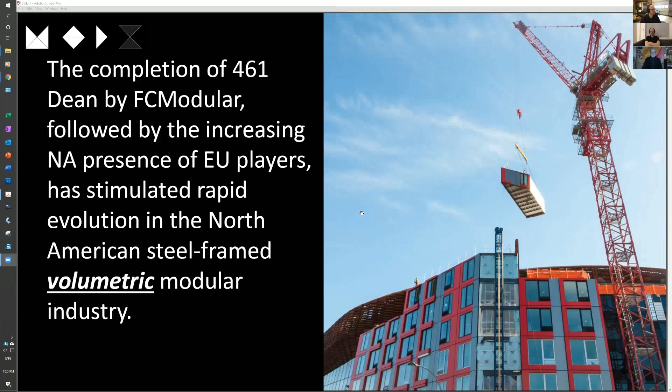Yeah. So what's happened, of course, especially in New York City, you have the Polish invasion, DMD and Polcom, who are supplying modules into the New York market via Skystone Group, and they've developed a number of projects and continue to do so. So just to quickly cover what happened with B2, they imported a technology from England, which is popularly referred to as the Powerwall system, and the next slide really shows it.

There's kind of a plate with threaded rods projecting up from it, and these threaded rods pass up through the hollow steel sections at the corners of the modules. And if I go back, you can see here a module landing on one of those fittings. And so, of course, this provides, to be honest, very limited vertical tension capacity. So there's nothing to stop the building basically from blowing over in a high wind. Colloquially, that's the way to describe it.

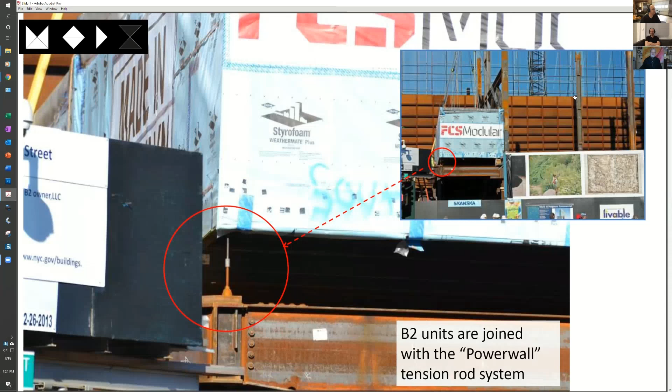So the way that's managed, as you can see here in the top right of that slide, is there is a brace frame, and there you see a much better view of it, and that's the system through which all of the lateral forces are converted into vertical forces and taken down to the foundations. So the modules are tied into that brace frame at multiple points over the length of the building.

And the very great problem that they had there was that the tolerances in the brace frame and the tolerances in the modules were distinctly different. And even the modules themselves were not terrifically accurate. So there was an enormous amount of shimming and cutting and packing and adjustment and monitoring and surveying and everything that was required to erect this building. And consequently, a lot of cost and delays resulted from that. So

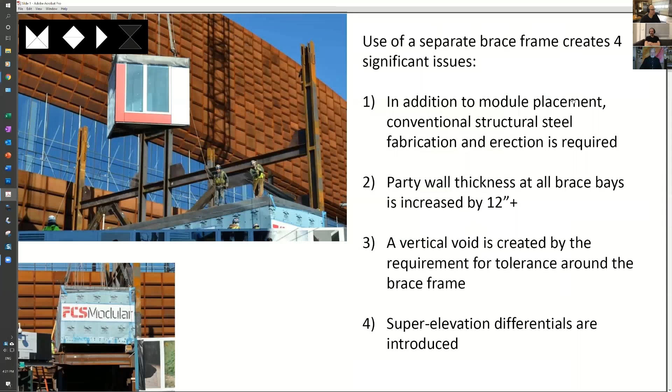I take some credit, whether it's justified or not, for introducing the idea of tolerance accumulation to the discussion about modular construction, tall modular construction. And I created this slide during the Vectorbloc period to explain that. What's interesting is if you looked at the facade of B2 when they got to about the 10th floor, there really was a 1 inch plus variation in the height of the stacks and large gaps starting to show up, which were attributable to this issue.

And so the conclusion was that you needed a precise, geometrically predictable system in order to control the dimensions of the modules in all three axes. So you knew where you were as you went up. You knew where you were as you're manufacturing the frames. You knew where you were as you're assembling the frames. You knew where you are once the frames are assembled. And that was the genesis of the Vectorbloc system.

So it preserved the hollow steel section structural concept that had been developed by Arup and manufactured by Banker Steel, but it added this steel casting at the corner, which provided all of the locating features. Yeah.

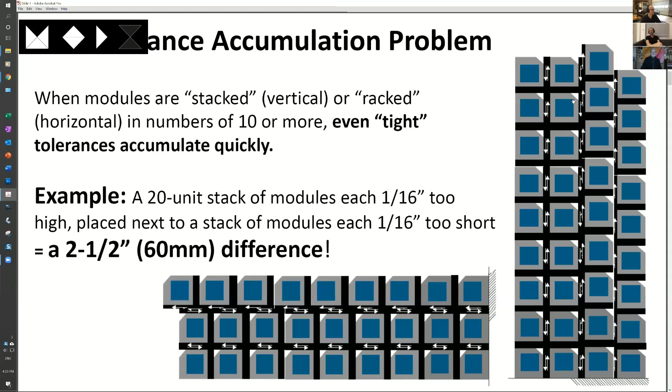Well, so I believe, I hope there's a slide that comes up that shows how this system is adapted to provide the lateral capacity within the modules. But essentially, by installing diagonal bracing, tension compression bracing, in a frame made with a system like this, the lateral forces are handled within each module. And as you stack the modules, you're stacking the diagonal system of the building as well.

Yeah. It's a really interesting concept, and I remember seeing it years ago, Julian, when you were starting to market this and discuss it at various conferences. One thing it got me thinking a lot about was, for lack of a better way to describe it, the innovative thing about Lego. I know modular is often likened to Lego, but I'm going to take a different tack on this. The interesting thing about Lego is the standardization of the connection, right? That allows you to have infinite variability within a system.

So you might describe this also as like the 110 outlet in North America: you can take any device and plug it into the wall and it works, because of the standard plug, the standard outlet. And in many ways, the problem with construction over the years when we start talking about standards is people think that means you can't have any variability. But what you've tackled is, no, the standard is the connection. It's the way in which the elements come together. The variability is everything else that you want to do around that connection. Which is really interesting.

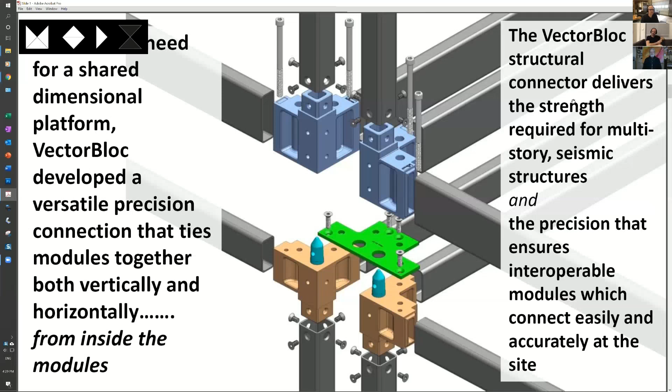Yeah, and by the way, there's a classic case here as well of how a whole bunch of things have to converge for this to work. The ease of making weldable steel castings, because this isn't cast iron, of course. This is steel, and it has to be weldable. The precision of the hollow steel sections themselves, the laser cutting of the gusset plates, the machining of the locating pins and everything else, the existence of the robotic systems, all of these contribute to the feasibility of an approach like this. And were this to be done manually, let's say, it would not be as cost effective for sure.

Yeah. That's great. Oh, Julian, yeah, why don't you keep going and we'll look at how this is played out.

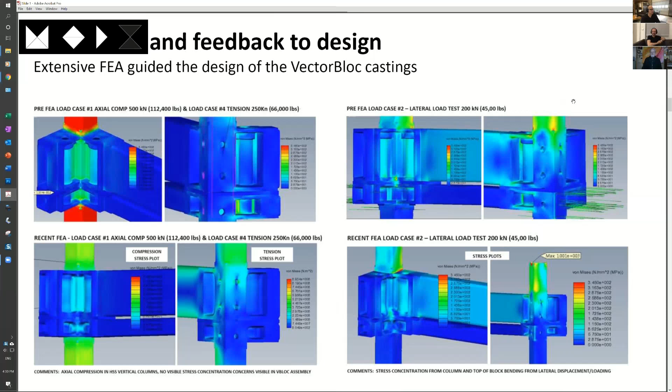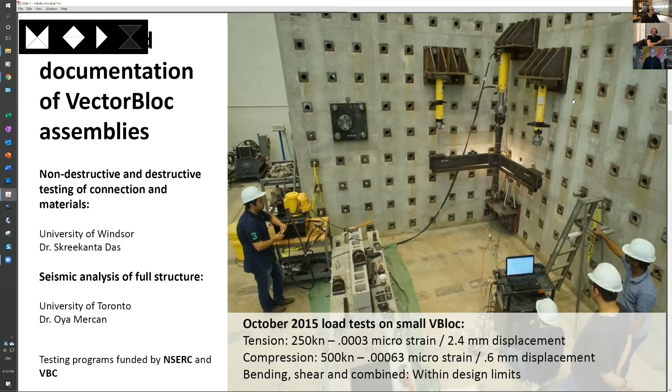Yeah, just by the way, we've covered this, but to be clear, again, the role of what's now called Industry 4.0 and so on is abundant here. We leveraged the 3D model of the Vectorblocs in order to do all of our simulation work prior to commissioning the castings and so on. And we did fully instrumented testing at the University of Windsor to get all of our ultimate limit state information in the bag and so on. So that company's clearly taken off, and it's now the dominant player actually in North America.

And so, going back to the mountain, the guy stroking his beard on the mountaintop with the icy winds on the side of his head and rethinking everything. My former parent company, the Walters Group, created and owns an entity called iSpan, who have a really beautiful I-beam shaped rolled steel section. It's basically like this classic C section light steel framed joist, except that both the top and bottom flanges are T-shaped, and they're double rolled. So they're putting steel where it's needed.

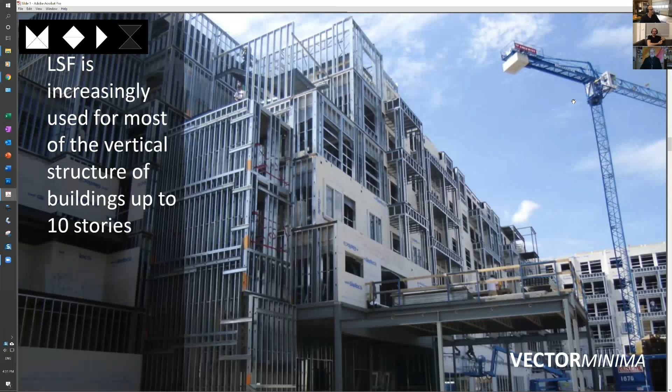Really nice. And I saw that there's a lot of innovation in this space, and I started looking at the masses, and they're routinely building buildings that are in the 11 to 12 pounds per square foot for the steel. The light steel framing, and that's very efficient, and the costs are very low. However, the state of the art in that industry is some really super dodgy welding that you really can't call real, as evidenced in this image here, and this is unfortunately ubiquitous. You see an enormous amount of this, and I can't imagine how this is all possible, and yet you see a lot of it.

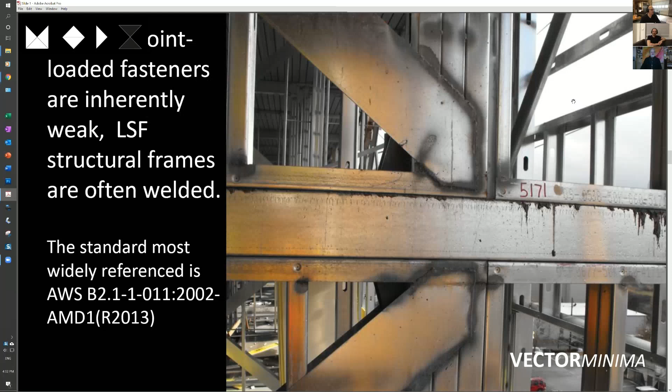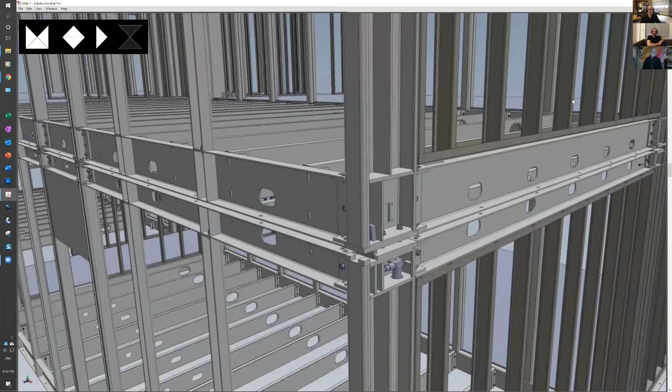And so we sought to develop a system that is, again, coil fed. The raw material is coil. Coil is a very efficient raw material for the mass production of structures. But where each member is utilized optimally in its role. So you see here the rim joists and columns. The rim joists obviously are loaded horizontally, in bending and tension and compression, depending on the forces on the building. The columns obviously in tension and compression. And so we've conceived of them as 1/4-inch material as the baseline, trending down to 1/8 and up to 3/8, depending on the loading. And the floor system, the horizontal system, is entirely light steel framing. This is highly efficient.

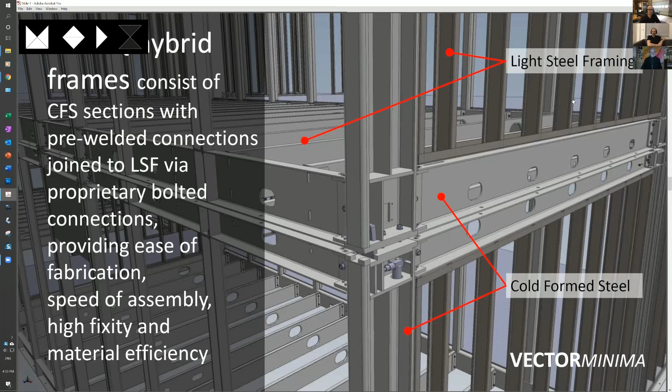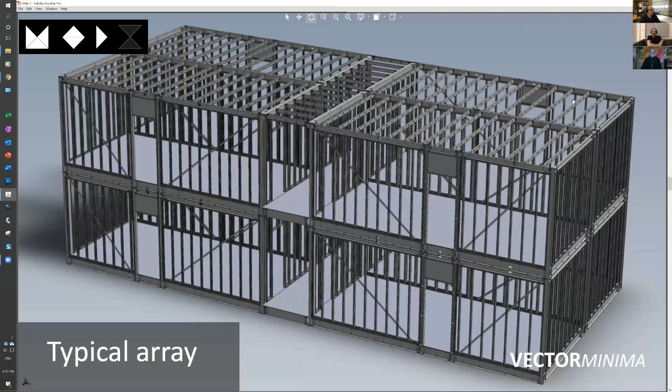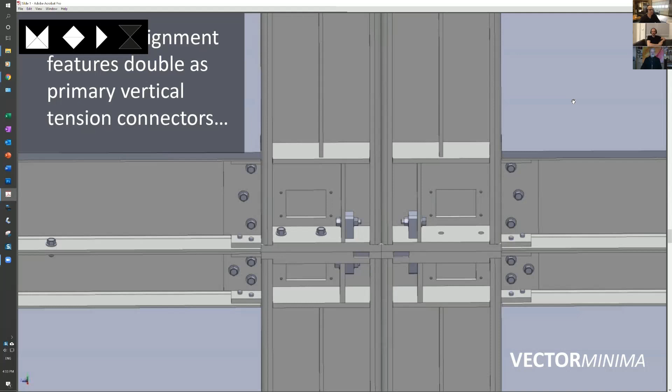So the skeletal structure of the building has essentially outline frames made of cold form steel, in other words, brake form steel, and horizontal systems made of roll form steel, the light steel framing. But an essential feature of the concept, which has been around now for decades, is this idea of precision locating features, just like those conical features on the power wall system, or the knuckles on the corners of ocean freight containers. So you need something that guides the module very precisely into its final location, and some means of providing that horizontal connection.

So we've been able to pack all of that into an extremely dense 4-inch by 4-inch space. So the entire connection, the vertical locating, vertical tension, and horizontal capacity, all occurs essentially between two modules in a 4-inch by 8-inch space, 4 inches by 4 inches on the top of each one.

And so this confers obviously an enormous number of benefits. So here you're seeing that the vertical locating feature is also the vertical tension capacity, is also the horizontal shear capacity. That connection piece, which has the tapered sides to it, provides a solid clamping action for the horizontal connection. So all in all, this is a very, very nice solution to the provision of vertical tension, horizontal shear, horizontal diaphragm action, and precise location.

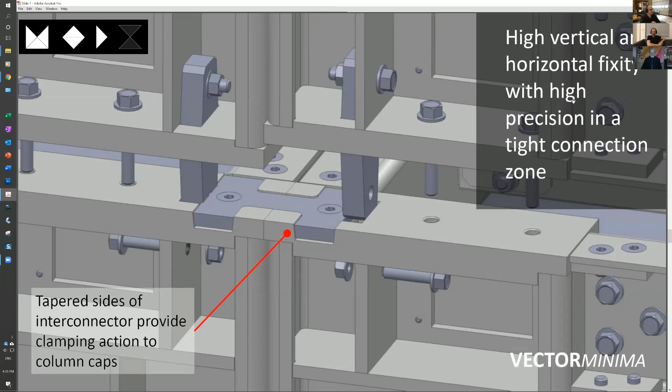And there's a benefit here, which is of course with those very wide, the typical column. We can build these with 4x4 columns, but you'd have to provide lateral capacity through some other means. If you bump those columns up to 4x12, and you look at the ribbing that's going on here, the stiffeners and so on, you actually have a significant amount of moment capacity in the connections, which gives you the lateral capacity that's adequate for low-rise buildings. So we're solving a ton of problems all at once.

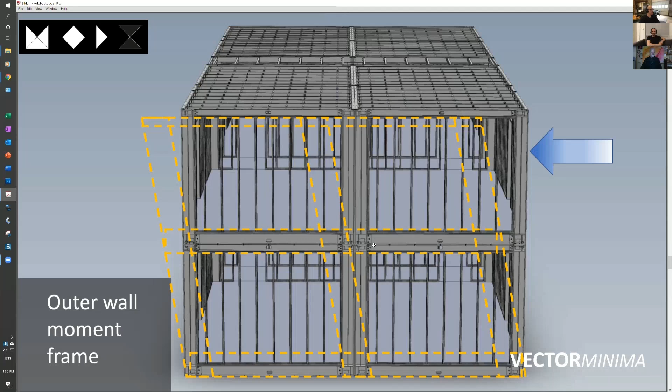I want to dive into the floor joist a little bit. So your typical connection between a light steel joist and the rim joist is essentially a sheet metal angle with a ton of Tek screws, a ton of self-drilling, self-tapping screws into it. There's other systems which are essentially an ear bent out of a cutout in the rim joist and fastened using mechanical fasteners to the joist.

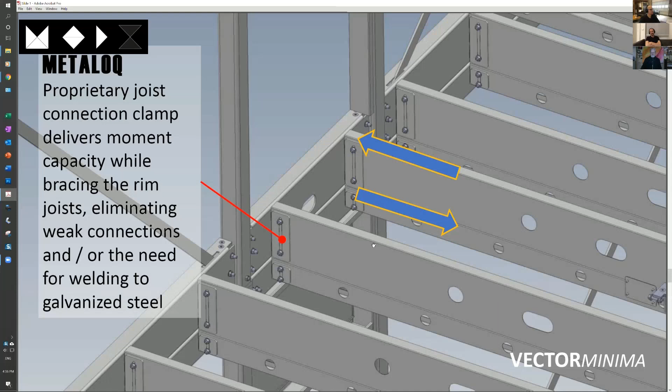The problem with all of those is that it's actually a very weak connection in this manner, and the fixity between the joist and the rim joist is very poor in the rotational mode. And there also isn't really a lot of tension capacity either. The only mode in which it's strong is in shear. And so we had to come up with a way of joining the joist to the rim joist so that they couldn't be pulled out, pushed in, sheared, or bent. And so that's where this approach comes in.

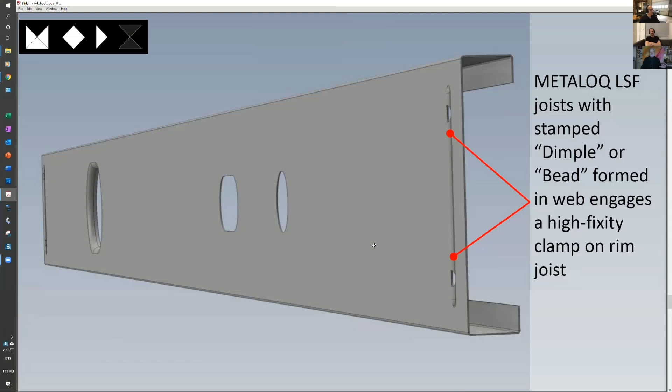We found that if you apply a moment to a light steel frame joist, then all the force goes onto the fasteners and they fail in shear or they tear through the metal. So by dimpling the light steel frame joist like this and then clamping it between two plates, we actually achieve a full moment connection between this sheet metal part and the rim joist. That's interesting. And this is absolutely key to developing the torsional stiffness that you need in a module floor assembly.

And the other thing, I suppose I should have a circle here. I don't know if you can see my cursor, but where the tab of that fixed plate goes through the rim joist, that's where the weld goes. And it's on the inside face of the rim joist, and therefore does not warp the rim joist in an undesirable way or cause a big bow in it, and so on. So we've resolved how to connect basically a sheet metal part to a structural part by clamping and still achieving the fixity that we need for a modular structure. And it's all 2 bolts and cheap.

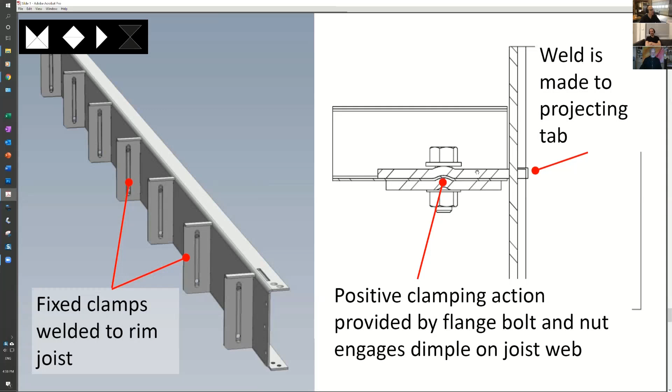So we've reduced the chassis really to 3 repeatable components. There's the light steel framed floor and ceiling framing, the outer horizontal members, the rim joist, and the vertical members, the columns. They only require a small work envelope for the robotic operation. The parts are easily detailed with lasers and so on. So it's really a very straightforward system to produce.

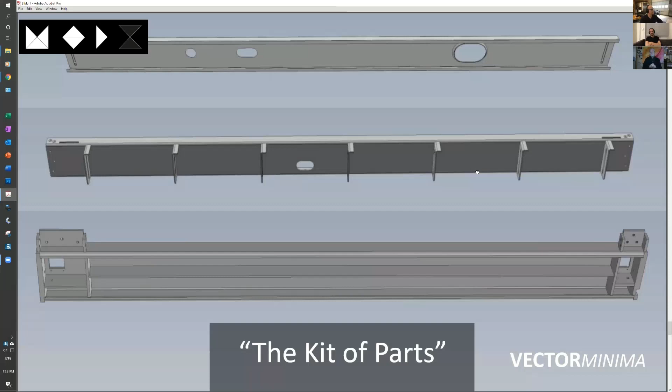And of course, I think an important point worth mentioning is that assembling those components to make a module frame does not require any fixtures. So you receive a kit in the plant, you need a flat floor, the parts bolt together, and you've got a square true module frame in a few hours. Say four workers with rolling ladders and maybe a few Genie lifts can put one of these frames together. And it's inherently square and true because the parts coming out of the plant are inherently square and true.

Yeah, so we've run a bunch of engineering simulations at this point with increasing levels of detail. So as usual, we concentrate on structures that are not optimal. Tall, narrow is a worst case scenario. It reveals your issues. So you see here an early run on a tall, narrow stack of 2 wide by 10 high. And you can see that only with the 1/4 inch material throughout, only in the lower floors do we even start to see any of the diagonal bracing over tensioned or over compressed. So it's obviously a very simple matter to bump that up.

And by the way, red in this case just means 100%. It doesn't mean actually fail. And that's 100% of a factored load. So what this really tells us is that we can lighten up our steel in the upper floors significantly. So 12 pounds a square foot, we don't even need to be that heavy, interestingly. So for low-rise structures, we believe we can get under 10 pounds a square foot.

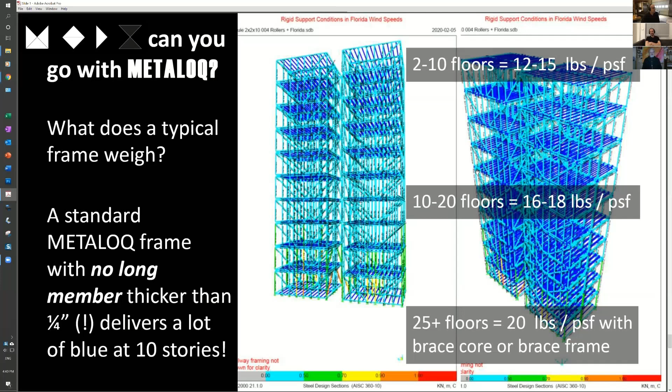So, Julian, and then another, yeah, please. Well, on this particular solution, have you been doing any testing, live testing of these connections yet?

Questions like that are always terribly embarrassing at this point in the development of a company. It's like, well, have you actually built anything yet or even tested anything yet? And the answer is, of course, no, we haven't. And so I suppose the conversation ends here, right? No, no.

I just saw in your last example you went and did some testing at the university. I just wondered if that was the next stage in some of this. Correct. Yes. So you're absolutely right, and it speaks to our business model. So our business model is we intend in this iteration of our efforts in the field of modular intellectual property development to be strictly a licensor of intellectual property.

Okay. So we develop these systems, and then we seek out entrepreneurial companies who want to deploy them. And the fees we get from those companies fund our work. So at this point, we've had adequate funding to get to this phase, and we've only just signed on enough people that we can take this to the next phase, which is, of course, full-scale prototype chassis and destructive testing.

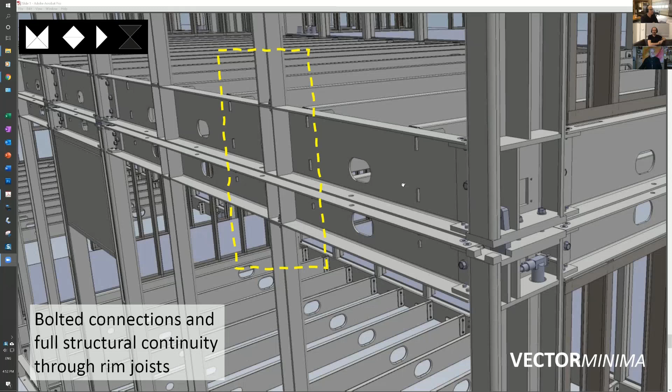So to cover a couple of other things here, just to get them on the record in this call, because I think you'd be interested in some of the other things we're working on. So the cost of all of the people that swarm on the building, even after the modules are placed, is very significant. So we've sought to reduce the crew size to the maximum extent possible.

So the first of the innovations that delivers this is what we're calling the plug and play capacity. You're leveraging the precision of the modules. So as the modules come together, the vertical locating features force them into alignment, and now they're dropping squarely one into the next. And so that opens up the possibility of having the water connections, the sewerage connections, the vent connections, and the electrical connections being made at the point that the modules contact each other. And so this eliminates the need for access covers and people to get into those spaces to make these connections.

And so the initial reaction of a lot of people to this has been, you got to be kidding. That's completely impossible. Never heard of such a thing. That'll never work. And then, grumbling, they'll go off and snap their garden hose together and start watering their plants. Or, if they're shop types, they might go and connect an air tool to an air line, and say, that Bowron guy's an idiot, while snapping the two pipes together and watering the lawn.

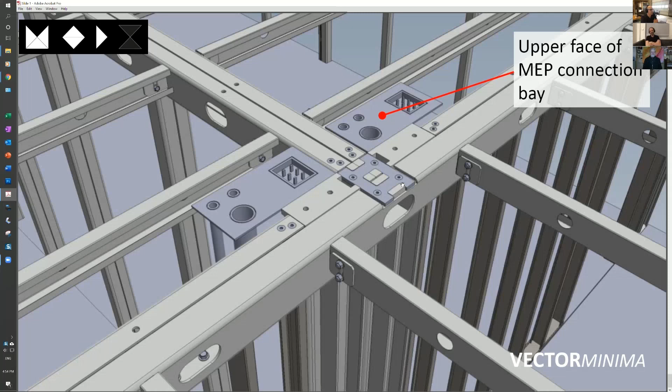And we've done math that shows that it's costing $2,000 to $3,000 per module to make electrical and plumbing connections, and another $1,500 to $2,000 per module to make the structural connections. And so to that end, we've also developed a system that has an autonomous mechanical connection between the stacked layers of modules that leverages the live electrical connection at the moment of setting the module. So you picture a module being placed and the electrical connection being live upon placement.

And now you have the ability to operate an electrically driven actuator that drives a pin into a link and connects the module to the structure. And so now the thing can't be blown off, can't be toppled by a wind. You may have to go in and supplement it later with additional mechanical connections, depending on the height of the tower. But at the very least, the module is safely locked into the building, and everybody can go home and get a good night's rest.

And so these two elements, the plug and play electrical capability and this semi-autonomous building assembly, are a component of the IP that we're developing for the next tranche. So the current block of knowledge is the structural system, and these are to be added over the coming years.

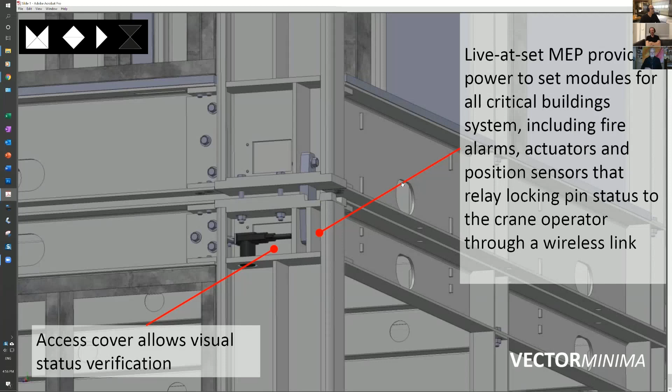Oftentimes, Ivan and I hear in the offsite industry, and have participated in projects in which people claim there's very little IP in the modular space. And in certain portions of the modular industry, that's true. But what you've shown us today is that there's plenty of innovation that is not just IP protected, but is able to build with other partners a more sophisticated solution to what we are seeing, which is finally a maturing of the modular sector to produce buildings of sizable scale. And you've been incredibly instrumental in that process.

And I think we all know that we're going to see modular take off here in the next 5 to 10 years. And you're certainly going to continue to be a leader and have a great mark on this industry.